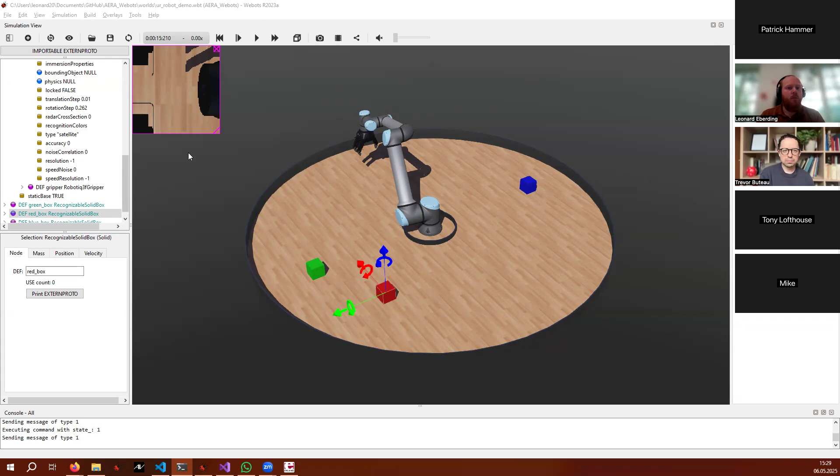So you can see that the hand moves towards the cube. And the interesting part is here, this reasoning tree that has been built by the system. I'm not going to go too much into detail, but here, for example, we have one node that has different solutions available to it. This one here is the required context, that is the hand position. So in order to have something at the same position as the hand, which is necessary in order to grab it, we need to have a hand in the first place and the position of the hand.

And then we have the possible solution that the cube is at the same position, and the possible solution that the hand needs to move first before those two are at the same position. So this model computes the confidence that the cube and the hand are at the same position, including either factual information that comes through sensor information or predicted information that comes through a process, that is, the movement of the arm.

And if we look in here, this is a bit technical, but I'm going to show you anyway. We can see the state of this particular node. This one here is the solution of moving first. This one here is the solution of those two being factually at the same position. This one here has a confidence of 0.0 because, as you can see, those two are at two very different positions. So the confidence that they actually are at the same position is really 0, whereas the confidence that a movement will lead to the two being at the same position is almost 0.5.

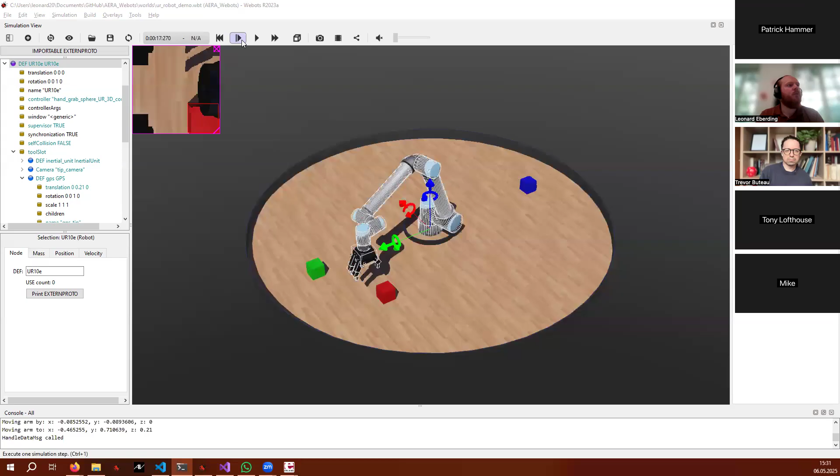So the commitment happens to moving right now rather than assuming that factual information is correct. You can see this one here is a fact, this one here is a process that needs to happen. If we now move on, let me single step here. At some point, the system will do a recommitment. And now, I hate it with two screens.

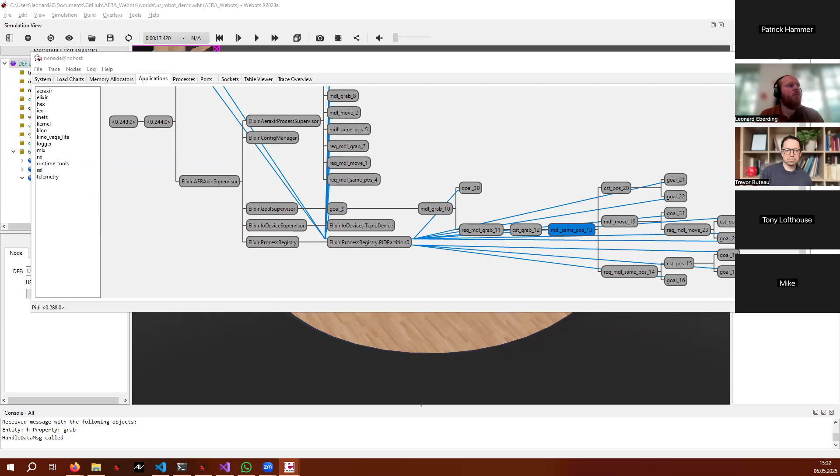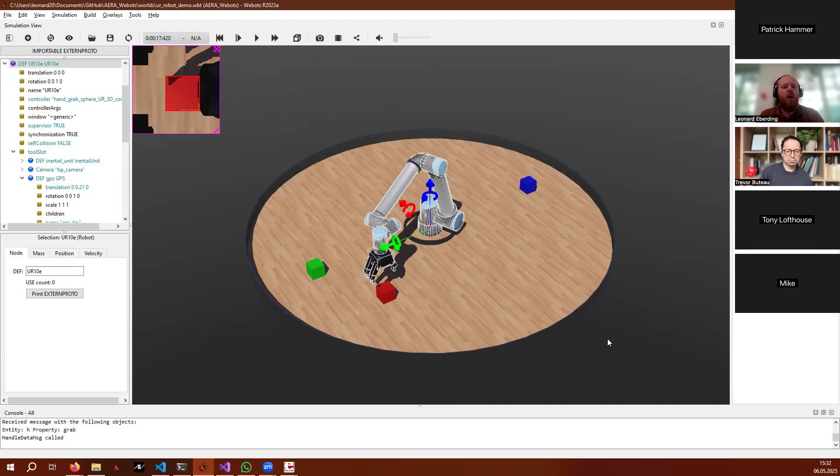Now the factual information of them both being at the same position has a higher confidence than that movement will lead to them being at the same position. This comes from the uncertainty in the actuator. So whenever movement happens, without new evidence that gives us information about where the hand is afterwards, movement introduces uncertainty, whereas pure factual information does not, because this is only the sensor information that we already have.

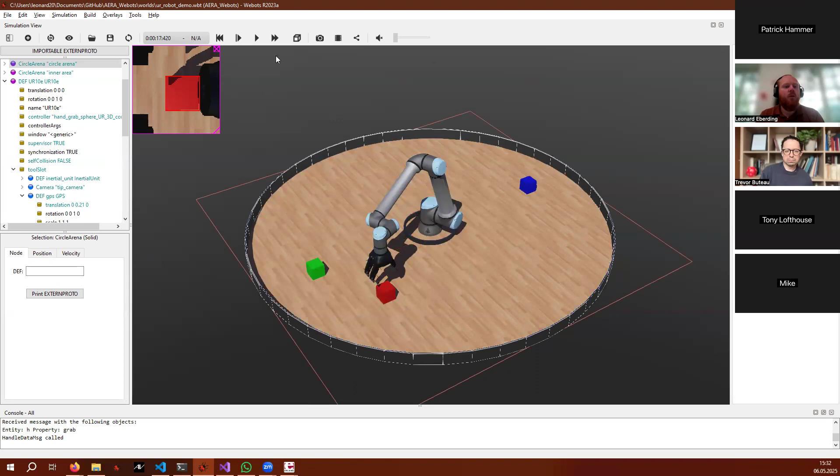So in this particular case now, the movement is introducing more uncertainty than the single perception, and now the system grabs the object. And this recommitment happens on the fly without any need of computing higher level goals. So yeah, this is again this reasoning graph. And as I said before, this model of computing whether two things are at the same position is based on these three different nodes, and these nodes compete for commitment either to factual information or to process execution.

And as long as the result of the move model, which, as I said, includes the actuator imprecision, has a higher probability of the hand and cube being at the same position later on than the pure perceived data, the move model is executed. And once this recommitment happens, the hand is close enough to the cube, the requirement for the grabbing becomes factual. This information is then streamed upstream to the parent node, which is this grab requirement, which has this same position on its left-hand side, and the grab model can then be executed because it is provided with factual context rather than context that is predicted by downstream processes.

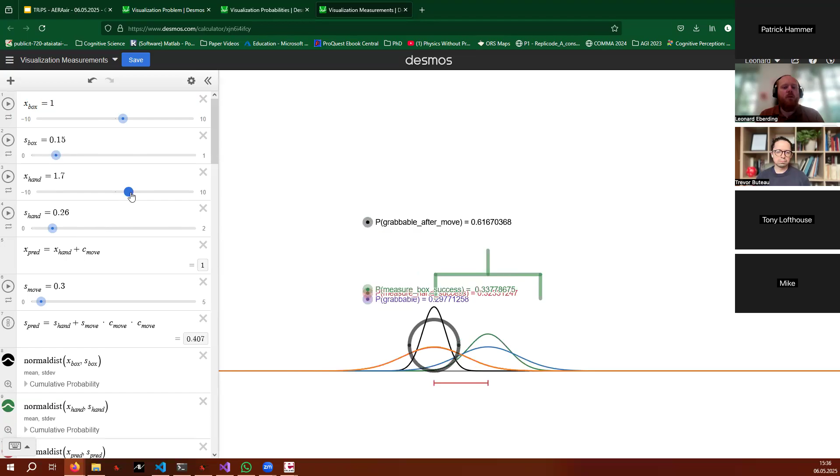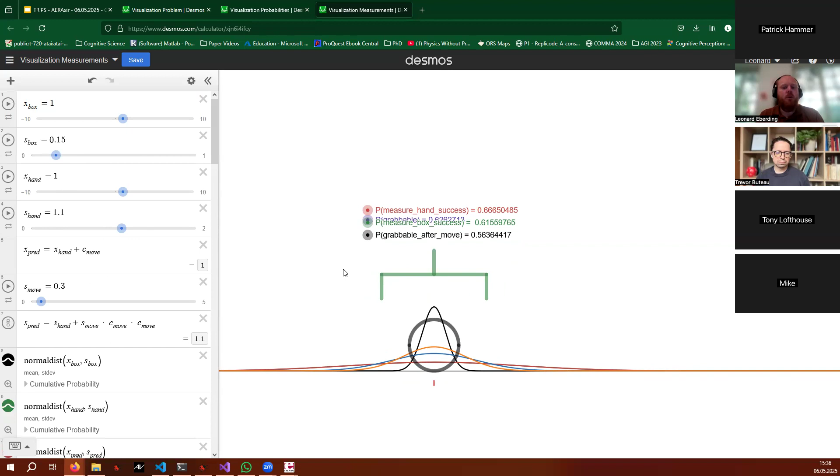So if we start further over here, then of course it needs to move first, and then the closer it gets, it will get to a point where measuring becomes a necessary thing in order to grab, because we don't know exactly where the hand is due to introduced noise or imprecision of movement. And then once we measured the hand, the grab success confidence increases and the system can grab.

So there would then be more different branches from this node, each of them competing for commitment by forwarding information of the uncertainty in the sensor stream, and providing solutions by measuring or by moving the different parts of the environment.

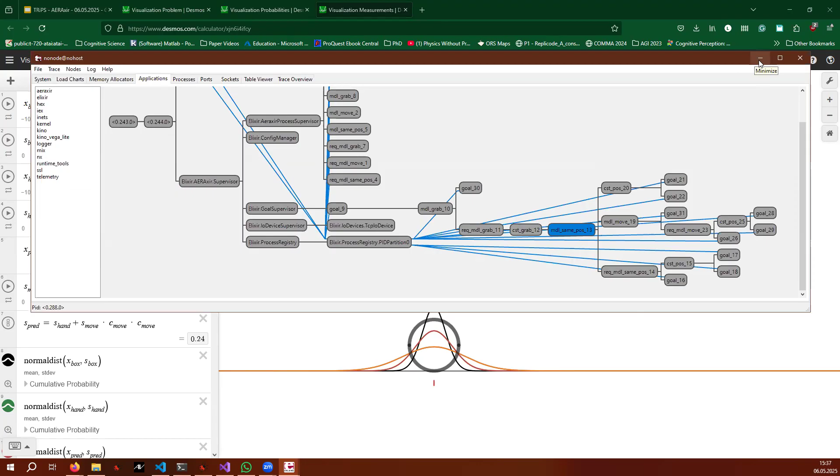Yeah, so this is already it. I tried to keep it as short as possible because I'd love to get your thoughts and maybe start a bit of a discussion of this.

So in concluding, I believe that using such a distributed reasoning, where sub-goals are independent instances of the reasoning chain that each stays alive in memory as a process rather than a singular computation of a chain, we can do a way quicker commitment and recommitment to different solutions based on the confidence in the success of said intervention.

And all of this information upstream, whether to grab, whether to move, whether to measure, even if we have later nodes that need to be fulfilled, like this is only the beginning of a task where the cube needs to be placed somewhere else, is all derived all the way down from perception, rather than having any sort of confidence measure that is primarily based on past experience.

I'm not saying that this is the only way to do this, or the singular dimension in which to measure confidence, but it is an additional dimension that gives us information based on the actual perceivable information in the world, and thus we can propagate information upwards.

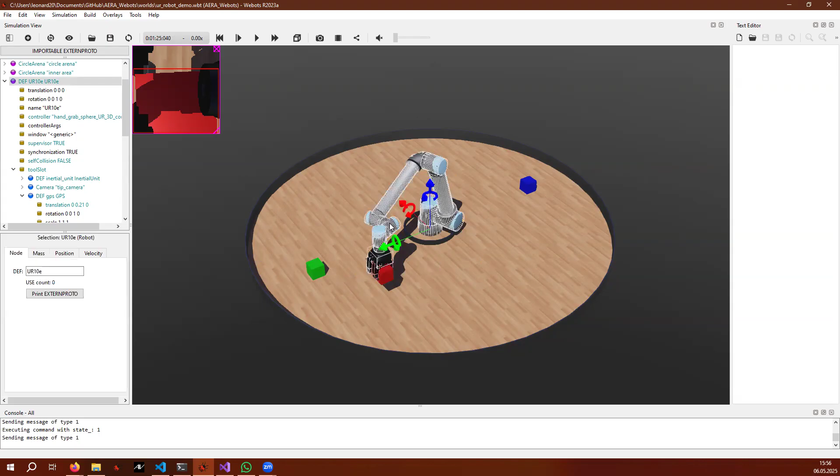I do not think that I will make it to have the actual joints of the robot arm being controlled by the system, because this becomes extremely complex very quickly, and I don't think that I have time for that and nerves for it right now. But maybe at least the grabbing of the object, like the actual opening of the gripper to the value that is necessary to grab the object, even if the two are not perfectly aligned, and then closing the gripper so that the object is held, is something that I really would love to see.

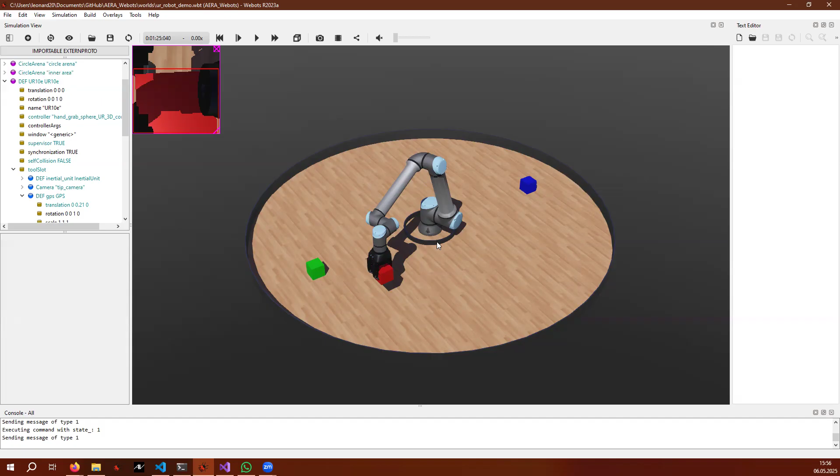Makes sense. I could also imagine that some higher level operator arguments could make sense, like potentially in the easiest case just a position where the arm has to go, but also potentially some discrete arguments, like how hard it should grab the object or things like that. Mm-hmm.

Yeah, definitely. I think it would be very interesting to see how hard to grab an object. If you have an egg, if you grab it too hard, you will fail the task by just breaking the egg, or having a wall next to the cube so that you're not allowed to overshoot at all, right? So that you have to slow down before reaching the cube so that you're not hitting the wall. That would also play very nicely together with this uncertainty of movement,

which must then be reduced so far down that you can be certain that you're not hitting the wall, right? So the movement of the gripper, the uncertainty in how far you close it must be below a threshold. What happened? Must be below a threshold such that the egg doesn't crack, right?

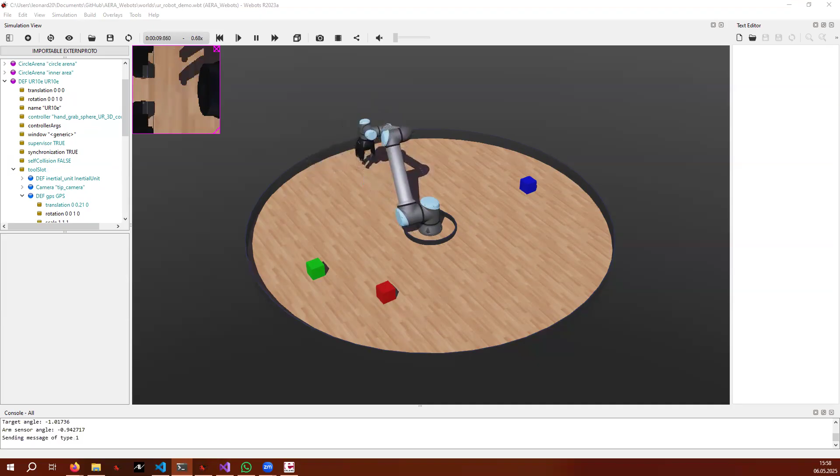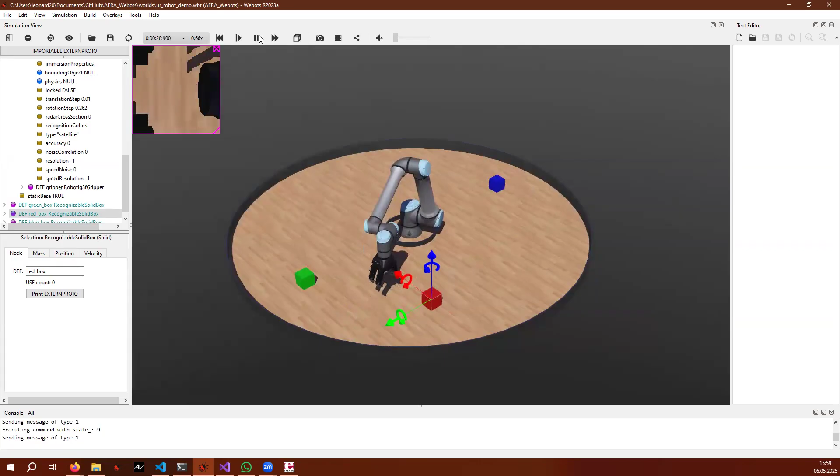Mm-hmm. That makes sense. With the movement, I wanted to show you really quickly, it's actually not just simply sending a singular command to move to the cube position in one single goal. It is constantly receiving new information, as you can see here, sending messages. So if I move this, the arm will, or should at least. No, it's not. Okay. Huh. This worked yesterday. It should follow.

I was just about to say, yeah, that's demo once again. It really should follow. I don't know why it didn't, but yeah. Mm-hmm. I should have just left it out.

This was my next question actually: if you were to put it into less of a static and more of a chaotic environment, how would you expect it to fare? Or if you don't think it would fare well, how would you iterate on it to equip it to handle things like its target moving either predictably or unpredictably?

Yeah, I really don't know why it isn't happening right now. Try again. Move less. I did some last minute quick fixes just like an hour ago. So maybe that was one of them.

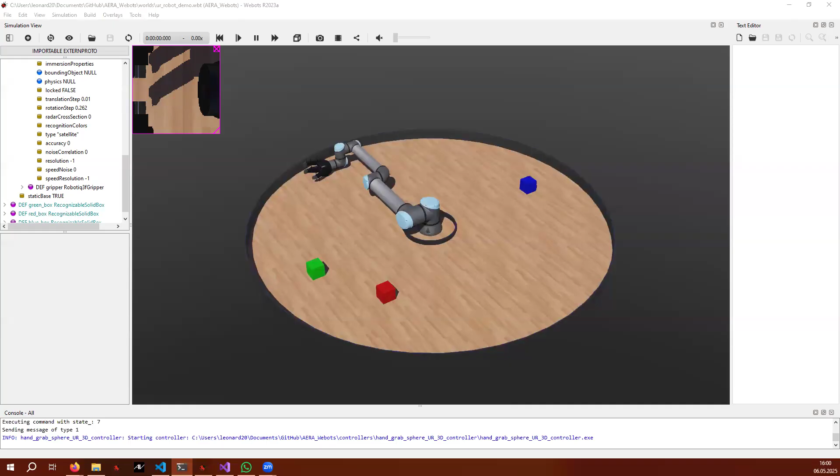How does it know the position of the object to grab? Does it know from the simulation, or through perception? From the simulation. Oh, uh-huh.

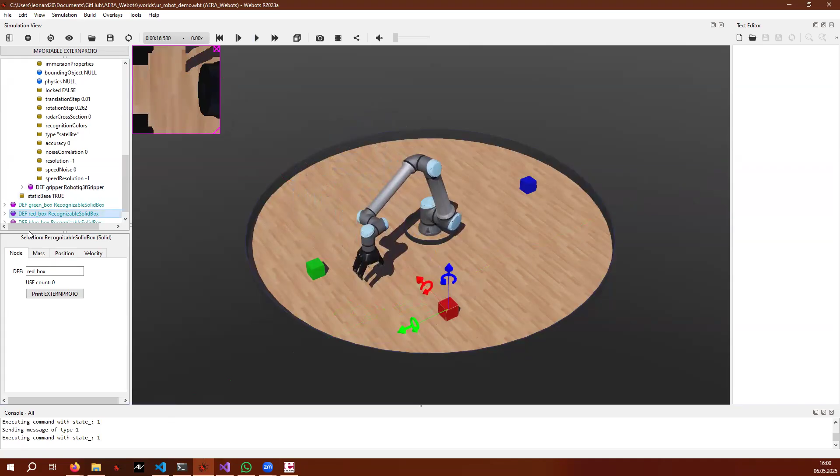Nope. No. Then this was my last minute quick fixes. Maybe I can even revert them, but I don't want to do that live now.

Demo. But it's a bit less deterministic than the existing AERA architecture. So sometimes, because I added some noise to the cube position and the hand position here in the Webots simulation, it becomes a bit unpredictable, and sometimes it grabs the object wrong and then it re-grabs and tries to grab it again. But as I said, I don't see it right now, so I'm guessing.

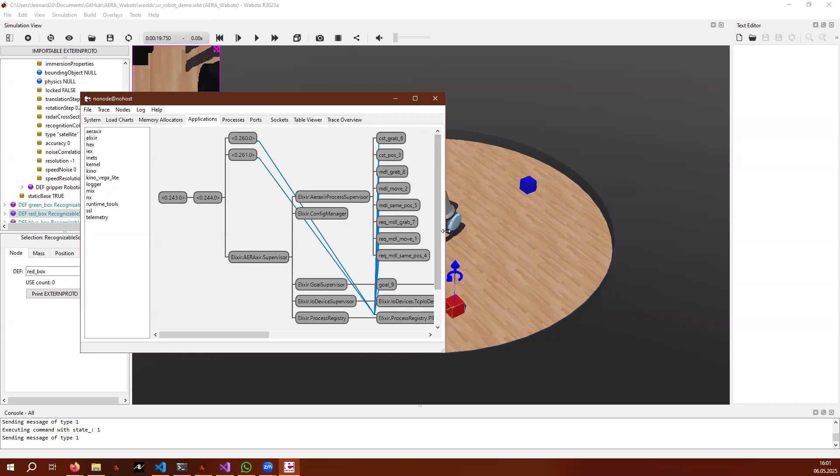Let me jump in and say something which you didn't mention. Maybe you thought it was too technical, but from what I understand, the reason you chose Elixir is because it's a real-time system where processes can receive messages and adapt their state, and that's what your system is doing. That's how it's going to be able to react to the movement of the object while it's running its system. Yeah. That's why the choice of this particular programming environment.

Yeah. Each of these nodes in this graph... so Elixir runs in the BEAM virtual machine in the background, and within this BEAM VM, you can start processes which can send messages between each other. So each of these nodes is its own process within the BEAM VM that can take messages and send messages. So they are a bit like microservices, or ROS nodes, or whatever you want to call them. So these processes can stay alive over a prolonged period of time.

So even if this goal is achieved and the cube is grabbed, we can keep all of this alive, and when the next goal is introduced to grab something else, the system can immediately chain through this existing network of nodes to find a solution that is already available. So it doesn't even have to plan again if a task that has already been done before is asked for again. Of course, this then runs very quickly, I believe, into memory issues. So you might not want to have this as a massive, gigantic graph where you never delete any nodes. So forgetting will be a crucial aspect of this.

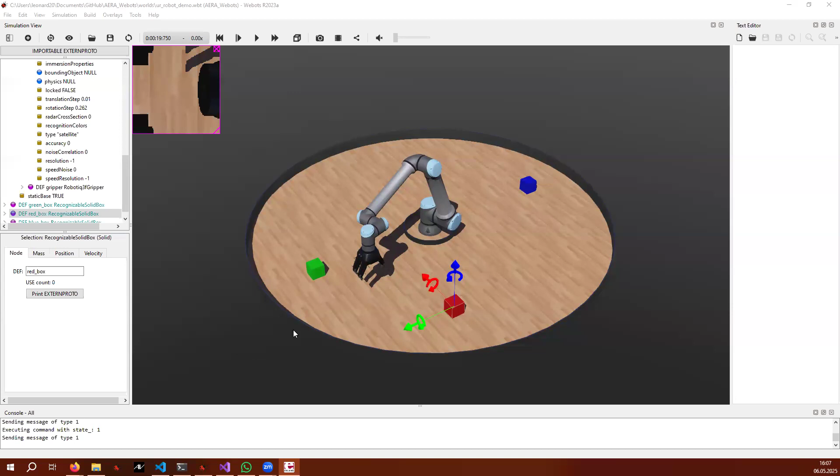Okay, I have a few questions. First, very, very interesting presentation. I think the core problem, we can say, is about when to take action with uncertainty. I have several questions. I want to start from the lowest level, that is, the measurement of uncertainty. If you allow me to use the vocabulary we use in NARS, I think in this discussion there are at least three types of uncertainty involved. They should be more clearly distinguished.

One is confidence, which you have talked about. Another one is what we call frequency, and the combination of the two we call expectation. For example, in your previous description, you said when you don't know what to do and you just directly close your grabber, the confidence will be low. But in my terminology, actually it's the opposite. The confidence will be very high because that's not going to work, okay?

So the frequency will be very low because the success rate will be close to zero. Confidence is very high because I have tried that many times in the past, and it never works. Or you can say the expectation is low, because expectation is the two combined together. Totally agree with you. Yeah, I think that's also related to some of the other comments. For example, when you have several plans, you say you pick the one with the highest confidence. Actually, at least in NARS, you pick the one with the highest expectation.